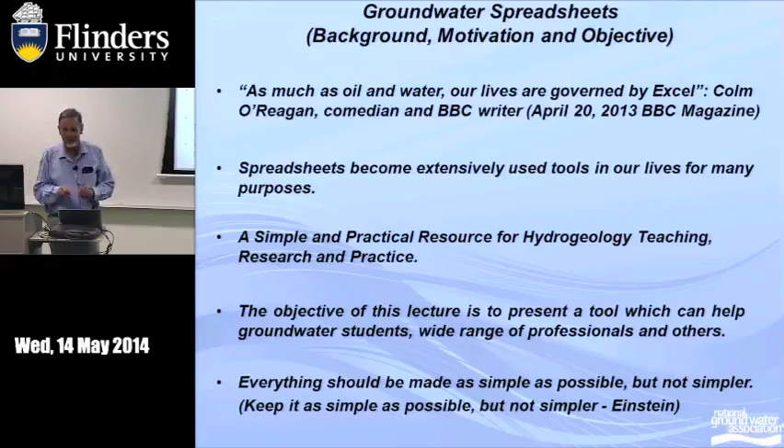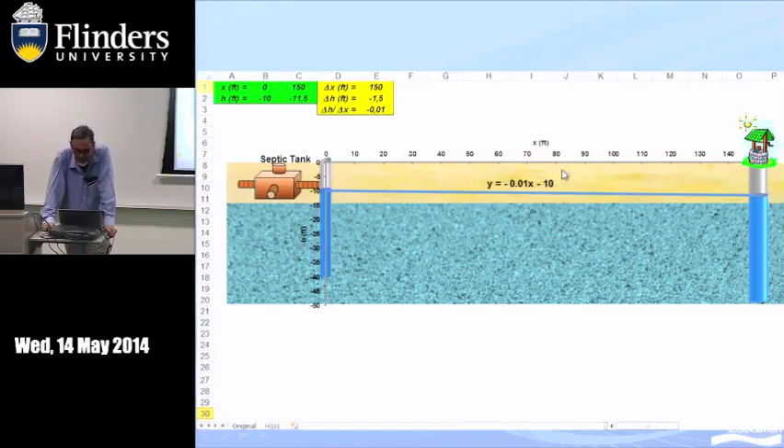I use metric and English units, but as far as you are consistent, here you have the slope. If you have just 2 points to measure the water level, it's very simple: there is just a line between these 2 points. If you use the spreadsheets and choose the linear trend, that's the simple equation.

And if you want to know, for this simple problem, the head every 10 feet, you can replace it here in this analytical equation. But another way to solve that, probably not too efficient, is as follows: the head can be the mean value of the neighboring head, just to obtain a numerical solution. Copy and paste, and of course select the proper values for the graphic, the X and Y, or the X and the head.

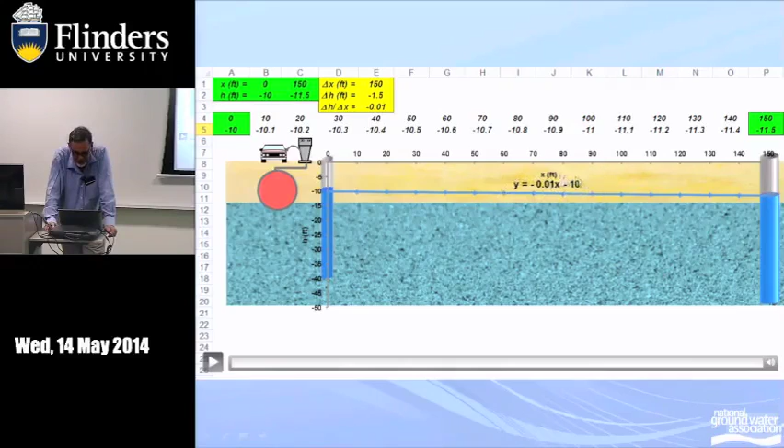And if you choose an iterative solution procedure, that's what you obtain: again the same line, with the head values. So that's a numerical solution of this line, and actually it's the solution for a homogeneous confined flow. We haven't talked about Darcy yet, but for this simple example you have here the analytical solution, this linear equation, and that numerical solution.

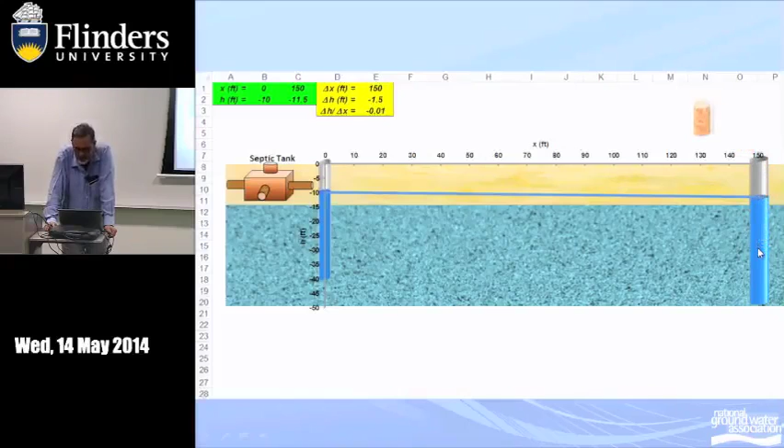Now, some overview of Darcy's law, very familiar to all of us. One way is to take a sample from a borehole and send it to the lab. There are many ways to explain Darcy's law. You take that sample, put it in a device, a permeameter, pass a flow through that cross-sectional area, and measure the difference in head over that length, and that's Darcy's law.

Very often it's convenient to express that equation per unit area, and this is the specific discharge. And if you have the effective porosity of this sample, you get the transport velocity.

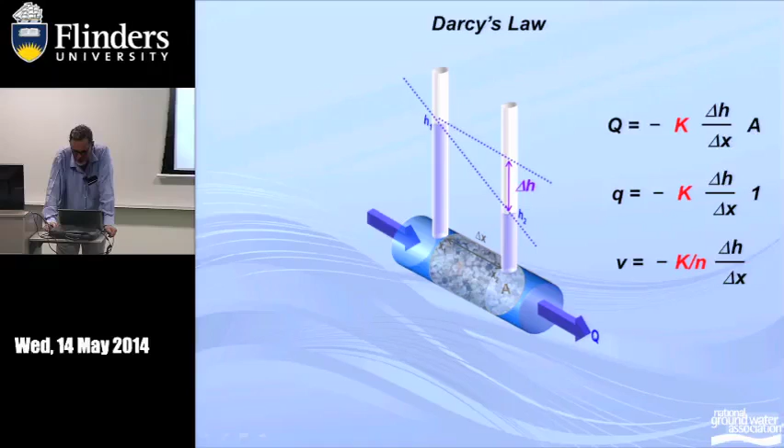So in our spreadsheet, you can recreate this experiment. Here I use green colors for input and yellow colors for output. You just give values of the head, and you obtain the discharge through this permeameter. There are other ways to do that - one is to pick that line with the mouse, pick any of those 2 points, and drag with the mouse to obtain the discharge rate. It's not too complex, and it's a wonderful tool to understand Darcy's law.

Here you can see that it works for Excel 2003. When Excel 2007 came out, well, almost all my problems and courses were in Excel 2003, and that property doesn't work in Excel 2007. So imagine my frustration when all my problems were in Excel 2003.

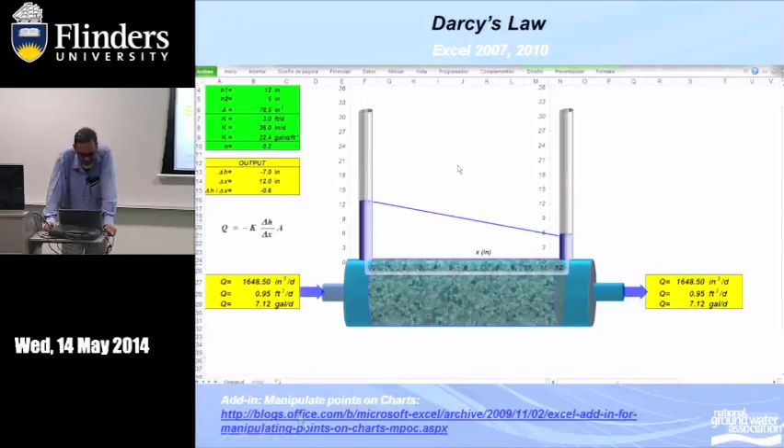But there is always a solution, and it's really a good solution. It was for Excel 2007, 2010, and you can download this to manipulate points on charts. For the same problem, you choose the graph, here manipulate points on the screen, on the chart, and you get that window. Choose that specific graph, and any of these 2 points, point 1 for example, and move that point. It's also a very nice feature to understand, in this case, Darcy's law.

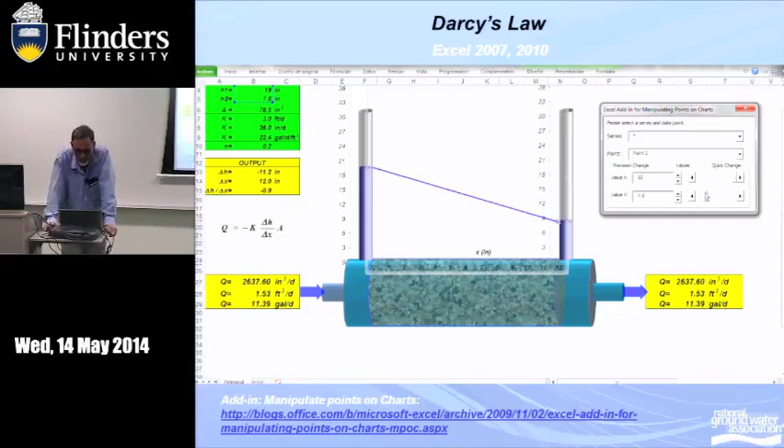It works pretty well. Continue with our first problem - you can calculate the transport velocity for a given hydraulic conductivity and effective porosity. You can measure, very simply, the travel time from this point to this point, and it's 1,000 days, near 3 years. The travel time can be a measure of risk.

If you deal with some coliforms, probably with 3 years the risk is low. If you deal with some hydrocarbon compounds, it can be medium risk, but some persistent contaminant, like some pesticide, is probably a high risk.

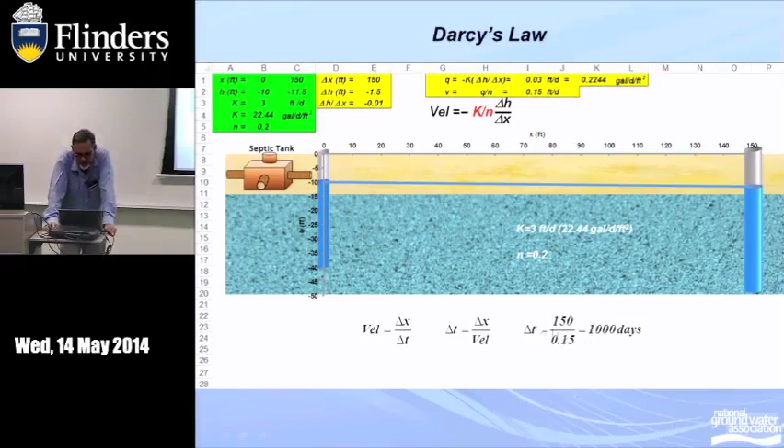But let's do the same, but for a fixed delta time, just to recreate particle tracking. So you fix the delta time - this is the same problem. You update the travel distance for this delta time. That's a very simple equation, and that's this yellow point.

So here I update the x, here is the delta time. By pressing F9 in Excel and choosing the iterative solution, you can see there the movement of that particle. For this simple equation, it travels at constant velocity, and you obtain the same answer, 1,000 days.

So in this spreadsheet, you can represent the analytical solution of the head for one-dimensional flow and the numerical solution also, but the advective transport velocity here is a semi-analytical procedure. Now let's see in a heterogeneous media that can be this special device permeameter.

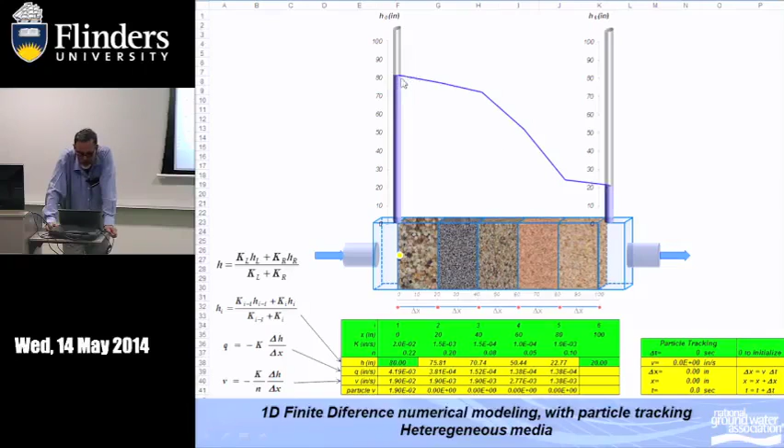So let's make the solution - here there is a horizontal head, so there is no flow. Let's begin with the difference in head between these 2 points, and that's the first iteration, the second, the third, and after 4 iterations for this simple problem, you get the solution for the head.

Now let's track that particle here every 120 seconds for these experiments. There is visually a low velocity of that particle - again, low velocity, which of course depends on the gradient and the porosity. But let's see here, you can see that it increased the velocity of that particle, and then again low velocity, compared with the previous one.

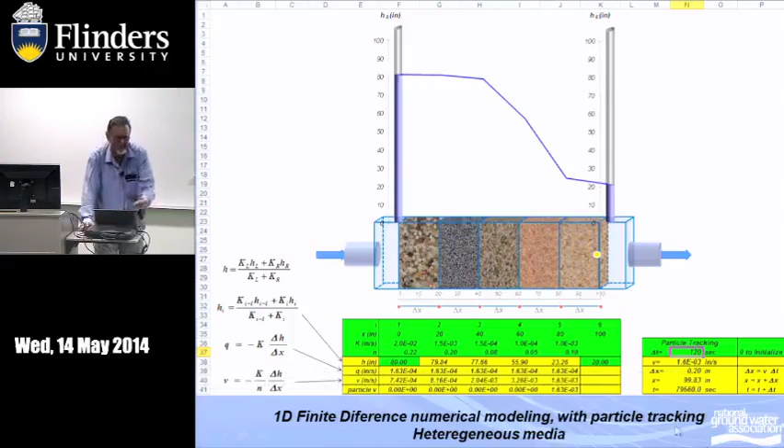Again, here is just a single formula, just an arithmetic, algebraic formula, copy and paste, and that's the way it works for all the models. Even MODFLOW - that's the principle of particle tracking, and also the finite-difference solution. So that's why it's an excellent resource, especially for teaching groundwater flow.

Now, the hydrological cycle can be used for groundwater management, for climate change analysis, sustainability issues. And well, this is the hydrological cycle.

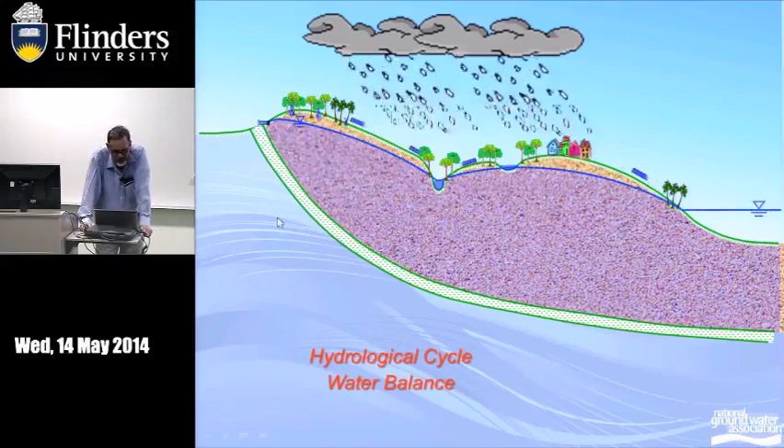Well, you can find in many textbooks the rain, the surface runoff, surface retention, infiltration, groundwater replenishment, interaction with the environment, here some spring, here also connection with the surface stream, with wetlands, regional flow, evaporation from the sea or lake, evaporation from surface water bodies.

If you have a shallow water table, it can also be evaporated, transpiration by plants, and groundwater use. So that is an ecosystem, that cartoon, and there are also other species that depend, especially groundwater-dependent ecosystems, like birds, which depend on riparian vegetation, which in turn depends on groundwater, and some fish.

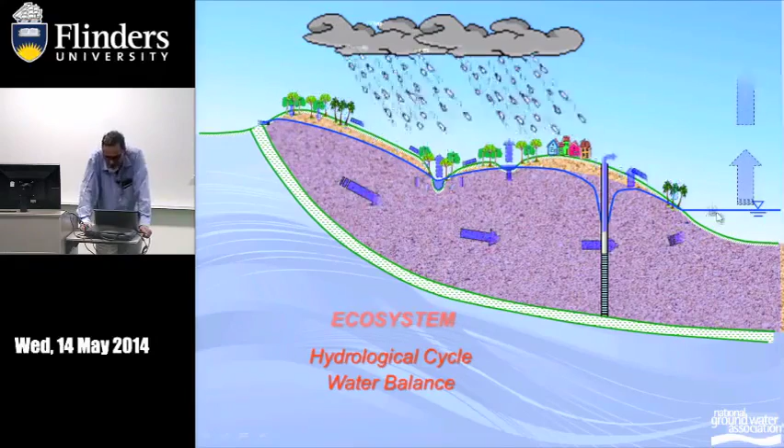This transition zone between groundwater and surface water, the hyporheic zone, plays an important role in some species.

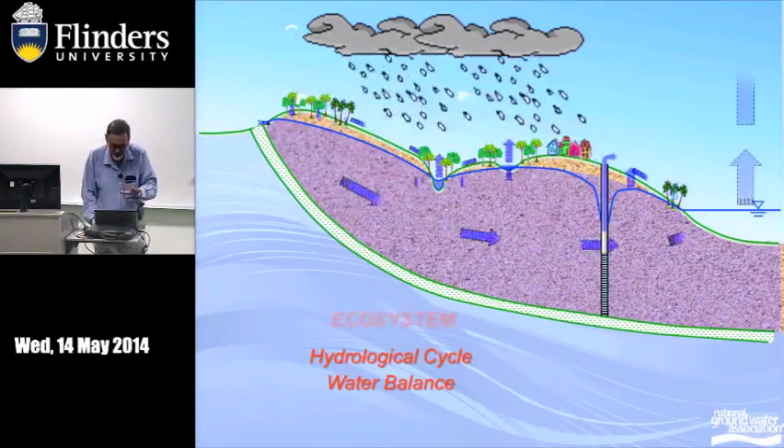This figure, this cartoon, this conceptual model, you can also model in Excel. Here is the same figure with some values: homogeneous hydraulic conductivity, the x direction, infiltration of 200 millimeters per year constant, the water level in the river and wetlands, the resistance between the river and surface water bodies and the groundwater, the pumping rate of this one-dimensional well—actually a channel—and the bottom of the aquifer, the saturated thickness, the transmissivity. For this specific problem I include a seawater interface using the Ghyben-Herzberg approximation, and this is the interface.

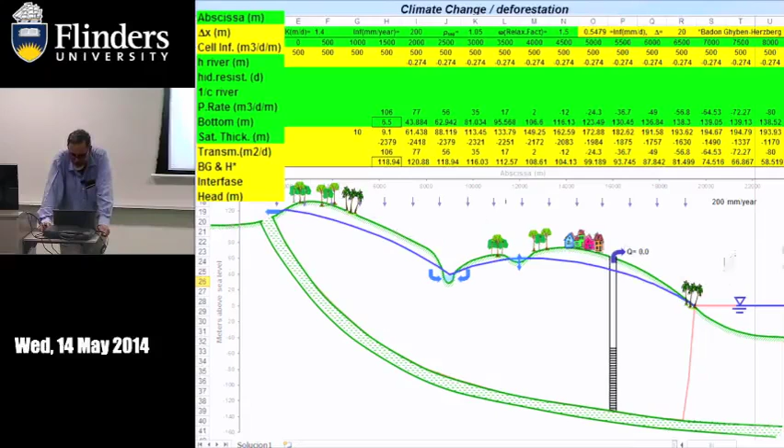So there are many ways to play. Models can be used to analyze different behaviors. Suppose you lower the infiltration 10%—can be climate change, can be deforestation. For this particular case, there is an impact on the springs, probably they disappear, a decrease in base flow, an impact on wetlands which sometimes disappear, an impact on vegetation, and in general, if there is a groundwater-dependent ecosystem, there is an impact on the whole system.

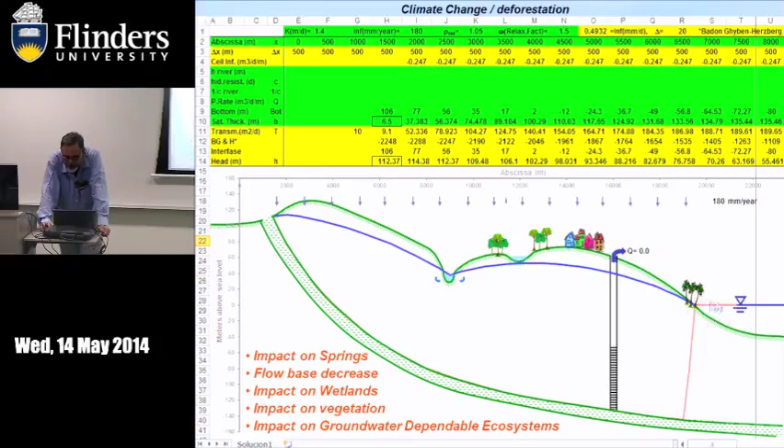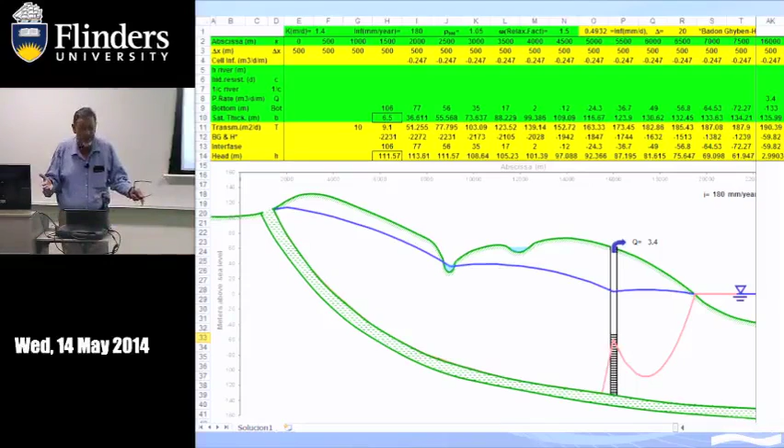You can also raise the sea level—this constant head—I raise it 4 meters just to see visually the seawater intrusion, so you can see the difference. Also, if you pump that one-dimensional well, there is an iterative solution, so you can see that kind of upconing of seawater intrusion in that well. That's another simple way to analyze that kind of system.

Pumping and slug test. A pumping test is just the drawdown as a function of the distance from the observation point to the pumping well, and as a function of time.

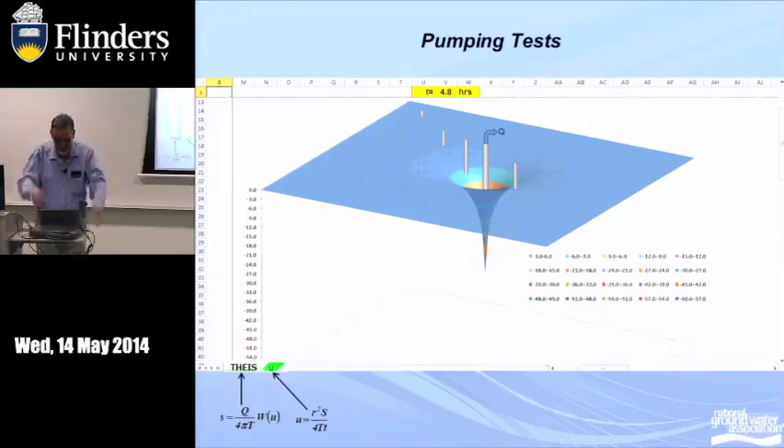This is the solution for a confined aquifer, so I use the Theis equation. If you are familiar with the Theis equation for a confined aquifer, use a single formula, copy and paste. I use two spreadsheets, one for the drawdown, and the other for the parameter u, which depends on time. I don't want to explain any formula, it's just the way to apply spreadsheets, again without any programming. You need the appropriate formula, copy and paste, and use the graphics display of Excel.

This is the classical solution of a pumping test in a confined aquifer. Here we have the field data: the well discharge, the distance of the observation well to the pumping well, and the time-drawdown data. In this graph, drawdown versus time—these black points are the data, and this gray line is the type curve for a confined aquifer, which I get from existing textbook references. This is the typical well function for a confined aquifer.

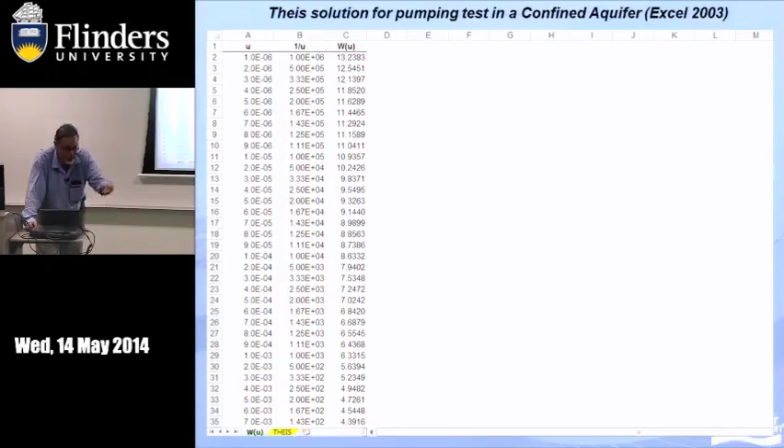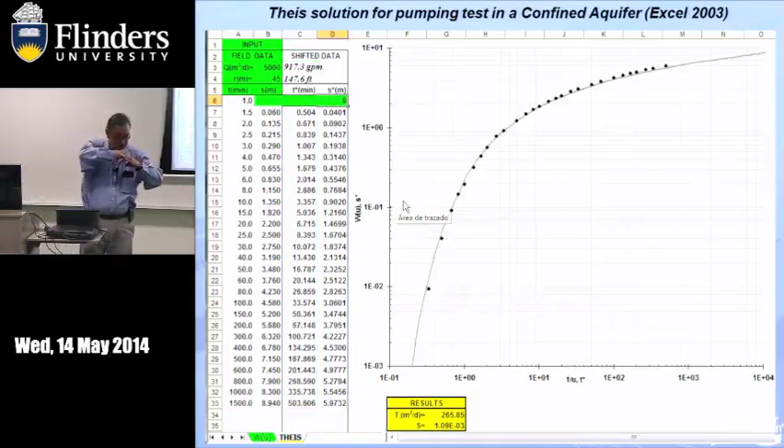You can use this for a semi-confined water table, or partial penetration. It's the same approach as we did more than 30 years ago, but now with the spreadsheet. You just pick with the mouse the point which is related to the others, and in the lower part you get the transmissivity and storage coefficient. You can zoom in to fit the field data to the type curve. So that's it.

Another way is an automatic fit—this is exactly the same problem. Here you fix the data and you get the approximation of this theoretical curve to your field data. You have to give some initial guess. Here is the reference, Carl McElwee from Kansas Geological Survey.

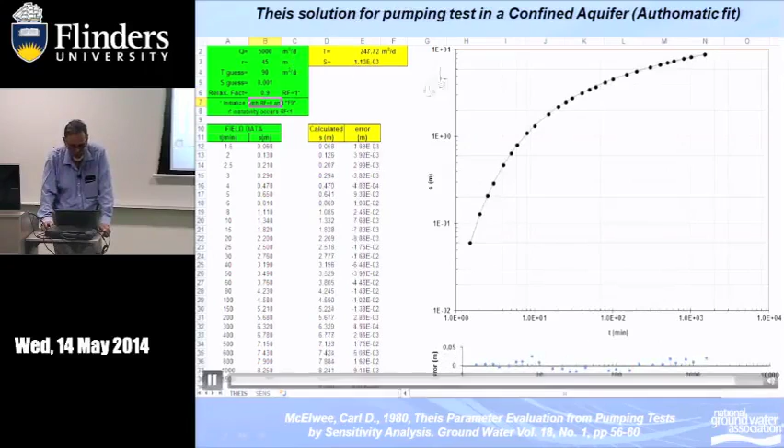In the lower graph, there is the difference between the theoretical calculated and the observed data. There are also other add-in packages like solvers if you want to do statistical analysis. But here you can see that iteratively, in approaching the theoretical curve to your field time-drawdown data, it very often jumps up and down and you never get the solution, but you can see it visually. In this case you use a relaxation factor, and you continue with the approximation until you get the final result of transmissivity and storage coefficient. Here is the difference between the theoretical data and the observed data.

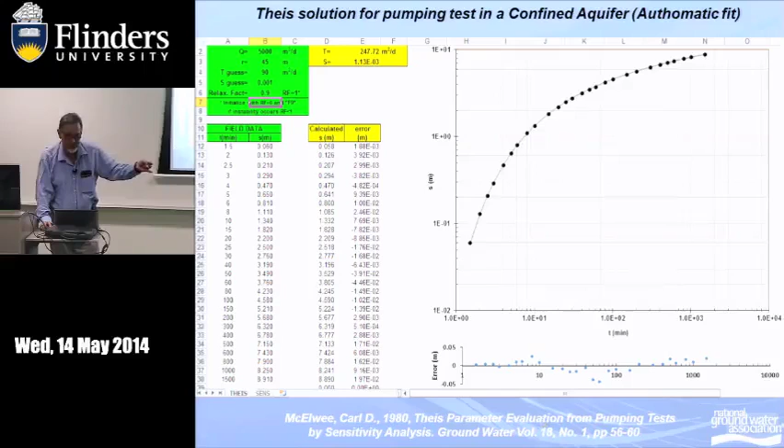Very recently, Neuman improved that approach to take into account the unsaturated flow. But there are a lot of books on pumping tests. You just put the appropriate table and fit in the same way to calculate your pumping test.

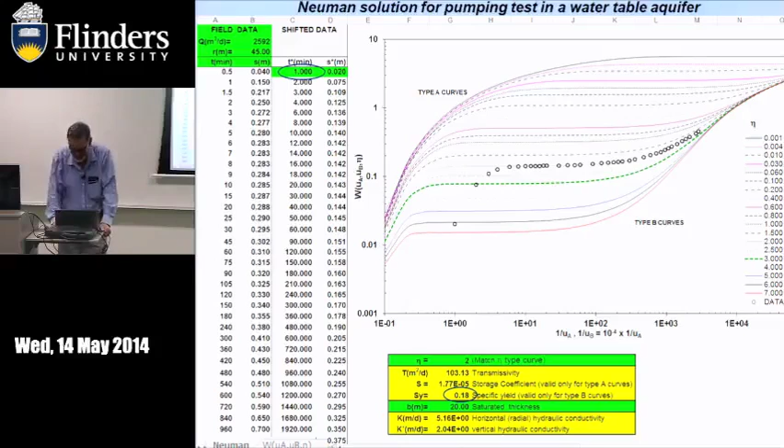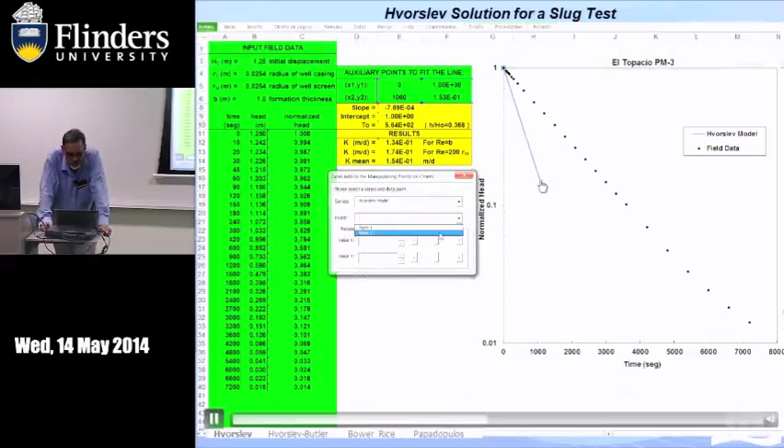A slug test. There are some procedures. This is the Hvorslev solution. Again, the time ahead, the initial displacement, and you get the hydraulic conductivity using that line. For example, if you manipulate points on the screen with that window, you choose any of these 2 points, this point 2, and just drag it. In less than a minute you can fit your data and get the hydraulic conductivity.

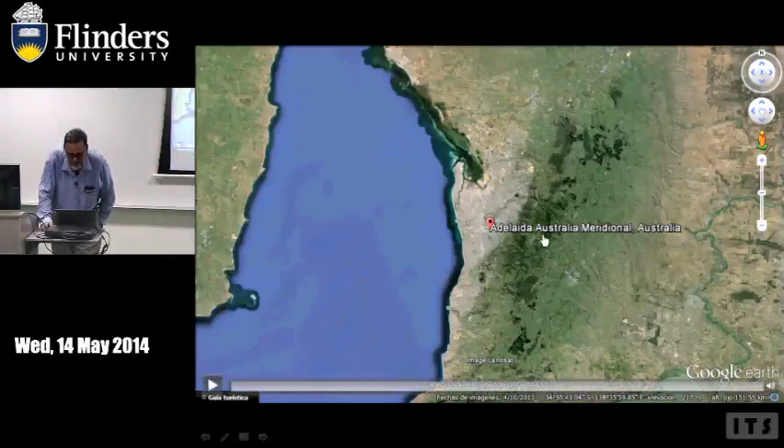Okay, now we are in Adelaide, in Spanish, Australia Meridional. But let's go to Colombia. Here with Google Earth it's very nice. Still, I have my jet lag. It takes me 3 days to go from Colombia to Australia. And this is Bogota, Colombia.

We have here some plain, the Bogota plain, Sabana de Bogota. Now there is some map, let's continue. So this is the Bogota plain, the Bogota river, and the flat area is mainly silts and clays, so not permeable. There are some local sands, but the main aquifer is a sandstone.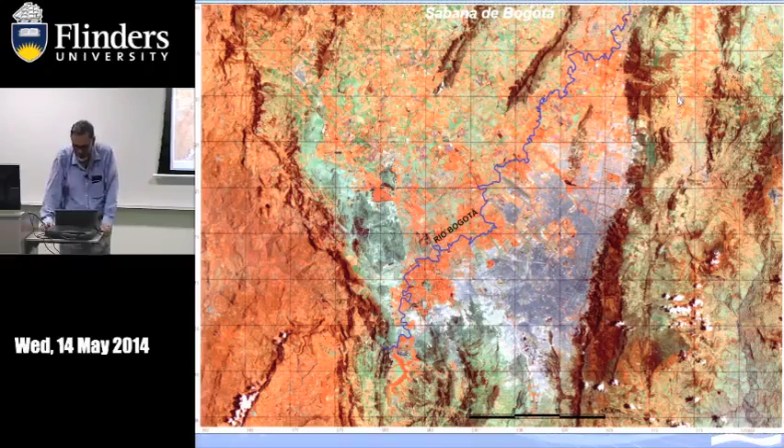Here are the outcrops, so there is limited recharge. I don't want to show you all the structure and the complex geology, but there are some faults. Let's see some pictures. So this is Bogota, the flat area, clays and silts, and the sandstone.

You see here the dip is almost vertical, so there is a very big fault here, and here some fractures. That fracture, but also this is the place where I worked, University of Los Andes, the Faculty of Engineering. But let's see another view, and you can see here also the depth of that sandstone.

And this was a pumping test we ran 30 years ago. Let's zoom in. What I want to show you is that we used one well and 3 observation wells. That's the theoretical cone of influence for 1 day, 2, 5 days, 10, 1 month. And this is for one well. Now we have thousands of wells, so the sustainability issue is a big problem.

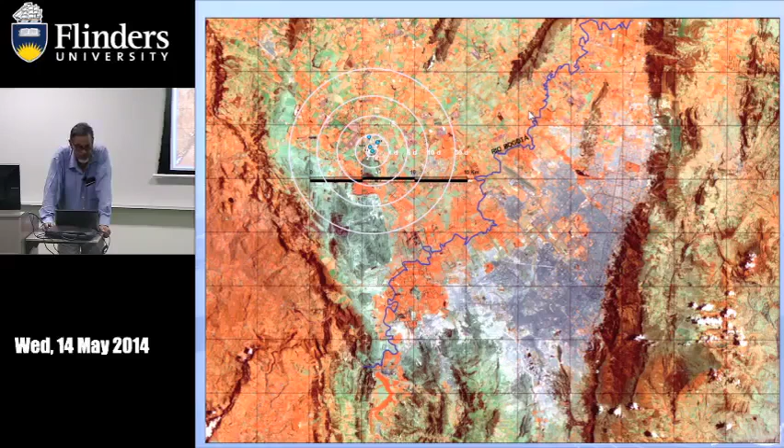There is a depletion of the aquifer, but we use spreadsheets for that calculation. This is a very simple problem, just the drawdown in the aquifer. You can include well losses, of course, with the transmissivity and storativity of that aquifer. And this is the solution for 1 day.

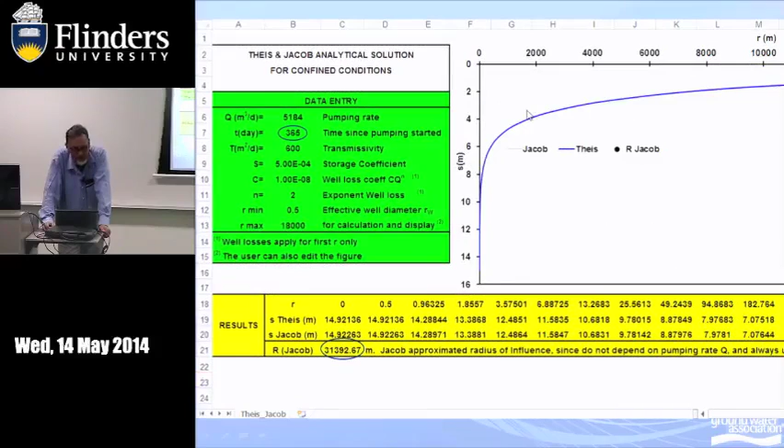This is the theoretical cone of influence for 1 day, 5 days, 1 month, and so on. So that's another way to use spreadsheets.

Superposition principle. Well, superposition principle is just the additive property of linear systems in space and time. And spreadsheets are wonderful to work with that superposition principle. This is the solution, the steady solution in a confined aquifer. There are formulas, but I will not explain that.

That type of formula you just put in a single cell, copy and paste through all the spreadsheets or the area that you want to analyze. Here the parameters, of course the hydraulic properties, but also the well discharge and the location of that well. Here is well number 1. You can copy the entire worksheet to another one and change the well discharge of that specific well and the location of that well.

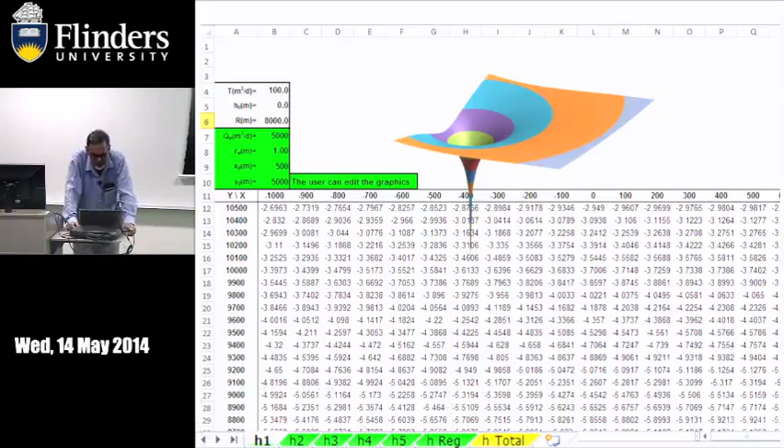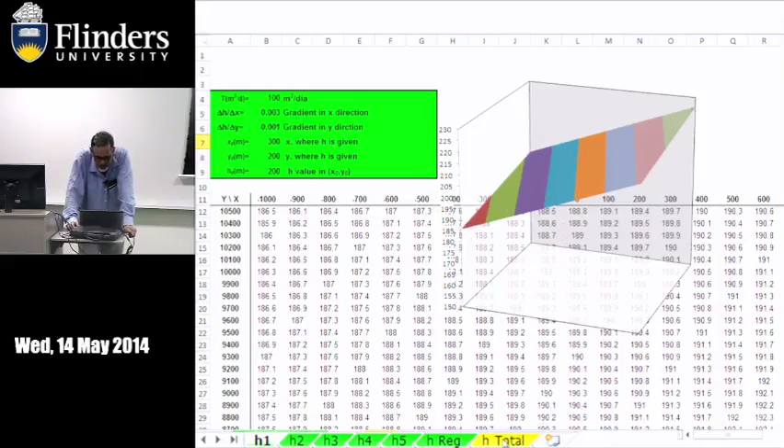And you can include 2, 3, 4 wells for these specific problems. I have 5 wells. You can include a regional gradient, here the slope in X and Y direction. And the result is just the sum of all the previous spreadsheets, and that's it.

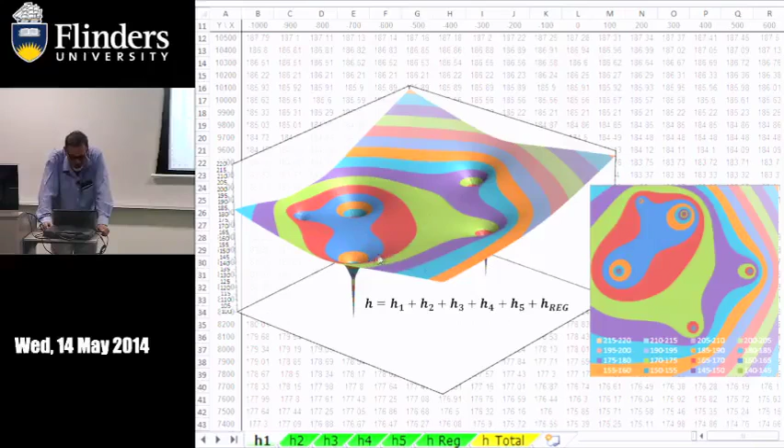So that's an analytical solution of multiple wells. We used it in Bogota mainly for the flower industry, which has some wells. If they find a good well, they just drill very near another one because that well produces water. That's the way they think, and it's difficult—it's completely different from how we think. That's also one way to show and calculate the influence of a neighbor well on the whole system.

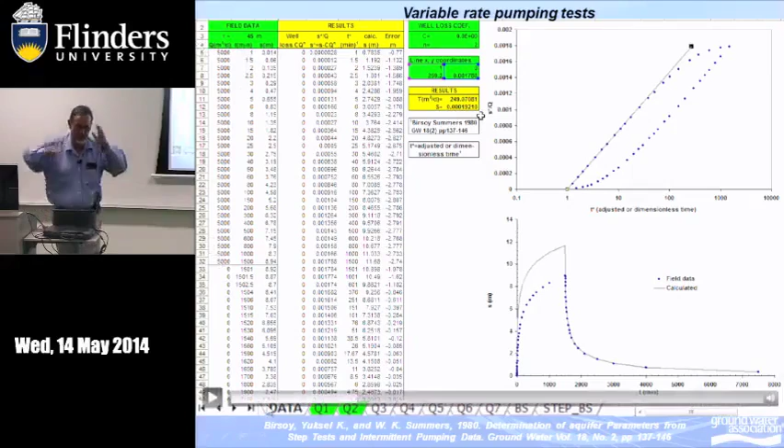I haven't seen this procedure in the literature, but you can use the entire data as shown here. The approach is to adjust until you get a good match between the theoretical simulated points and your field data, and from that you get the transmissivity and the storage coefficient.

I have probably hundreds of pumping tests. This is a pressure transducer in some well, showing the pumping stage and the recovery stage. We advised the well owner not to pump the well, but nobody was there, so he decided to pump for 5 minutes, and the pump was damaged. But with this procedure, you can include this case too, getting the transmissivity, the storage coefficient, and the well losses.

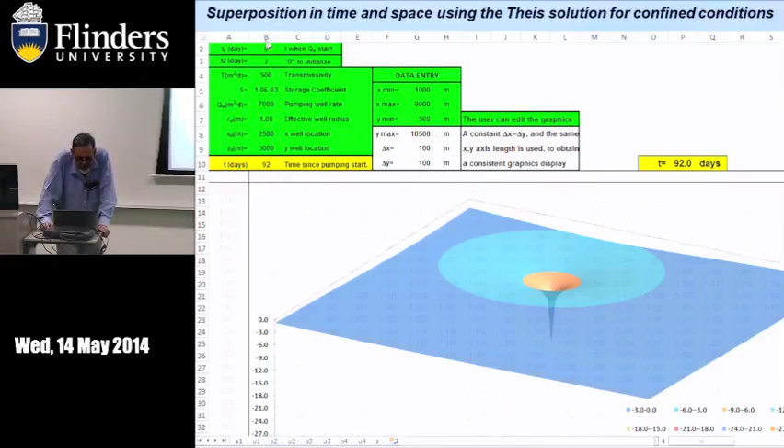This is the Theis model also, but with a variable rate. The last pumping test example is very similar to the first, using the Theis equation, but this particular well begins at time 0, while a second well, with another pumping rate and location, begins after 1 month, and so on.

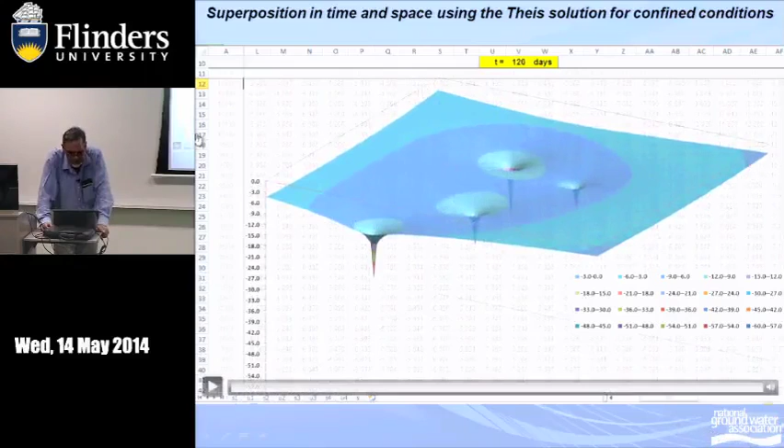Here I have 4 wells, and here is the cone of influence. The second well begins after 30 days, another after 60 days, another after 90 days, and if you have more wells, you just copy and paste. This type of 3D graph uses the built-in Excel graphics.

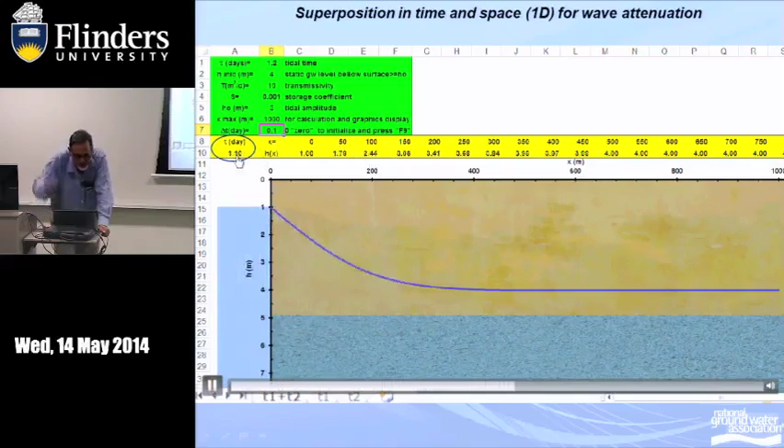I have one, but probably more examples. This is also superposition in time and space for one-dimensional wave attenuation. When the head increases, the tidal rise, I use one spreadsheet, and another one when it's lowering. Here we have the time of that tidal cycle - it dissipates the head in the aquifer, and after 1.2 days it lowers again, and you can see the wave attenuation.

So, well, you can also solve that type of problem.

Here I combine particle tracking with superposition. I adapted this for a real problem, with the gradient in that direction. There were 3 wells, and some release occurred in this area. You can give any color to the particles - in Excel I use red for polluted or contaminated particles, and white for fresh water.

Here is the gradient and the delta time, so you can see how each particle is moving. You can include any wells you want. Here I lower the delta time just to avoid jumping along the well.

You can see here that it will capture white or clean particles at this well too, but precisely these red, contaminated particles go to the farthest well. That's one way to use particle tracking and superposition. Again, it's just copy and paste - I use the velocity field for all the wells.

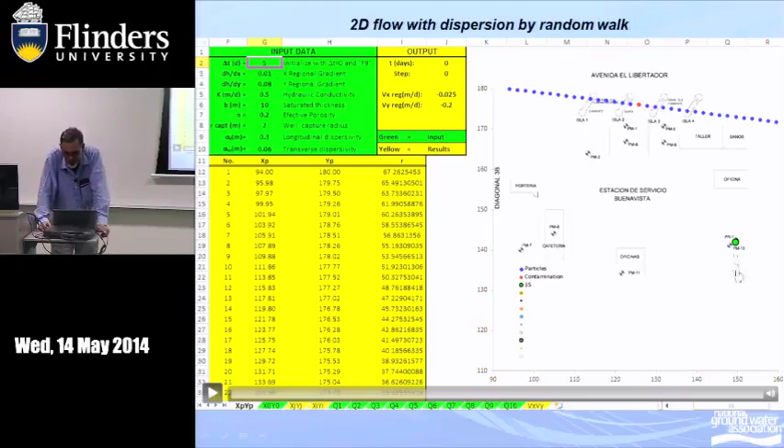Here is the same approach but including dispersion by random walk. This is a service station in Bogota. The gradient is in this direction, and blue represents clean particles, clean water. Here you have one red particle, but actually there are 100 particles in the same position. They do not allow drilling a remediation or pumping well here, only in the corner, so you can see the remediation is not too efficient because you pump clean water.

What happened here? Well, also almost all the contaminated water was pumped, but not all of it - some contaminated water just goes to the neighboring property.

This is using earth resistivity soundings - two-dimensional earth resistivity, but also one-dimensional earth resistivity geophysics survey, mainly for groundwater exploration.

What you have here is the field data - you measure on the surface terrain the apparent resistivity as a function of electrode separation, and plot resistivity versus electrode separation, that point there. You have an earth resistivity layered terrain; this is the theoretical curve, and this is the response.

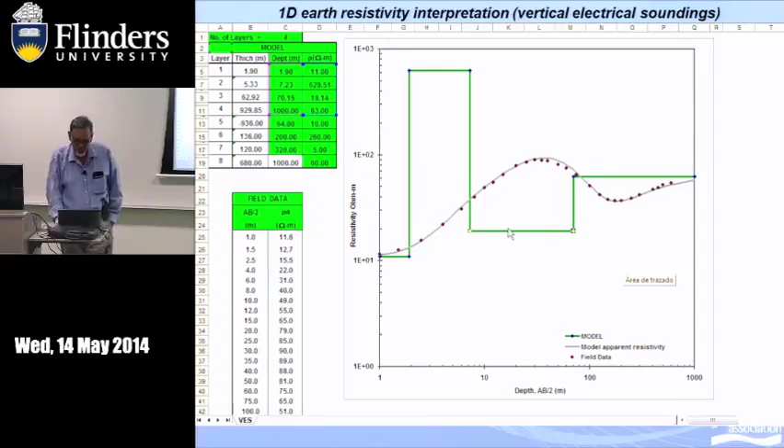So that's another way to use the superposition principle, and there are a lot more applications of this procedure: numerical models. We have talked about numerical models, and you have many very robust ones like MODFLOW and FEFLOW, but here is just a way to copy and paste with the proper formula, as we showed in the first slide. Let me show how a two-dimensional model is constructed.

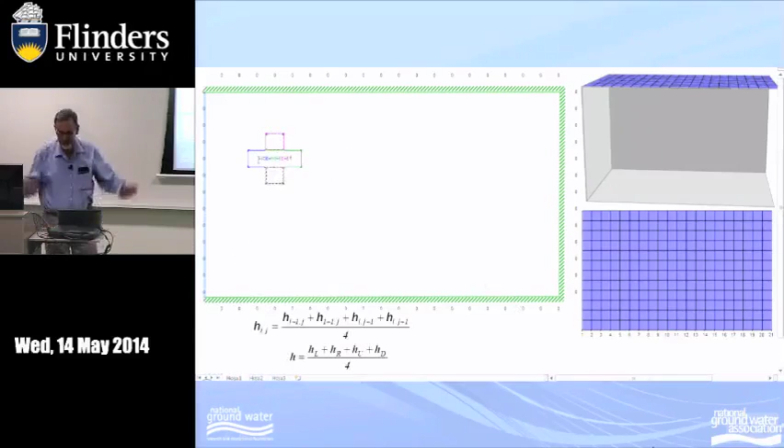Here it is built: a no-flow boundary here, and a constant head boundary, in a homogeneous two-dimensional aquifer. So the head in each cell is just the mean value of the neighbors—left plus right, up and down—and you use copy and paste through the entire domain.

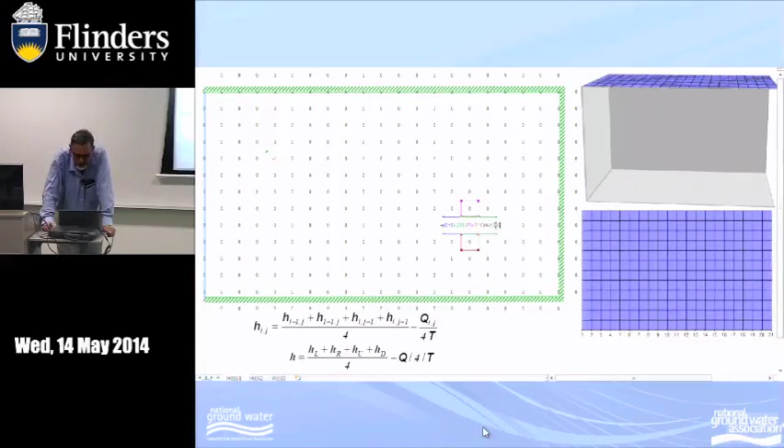You can, here I will put 2 wells. This is the formula, I don't want to explain in detail, but it's a very simple algebraic formula: the well discharge divided by 4, divided by the transmissivity. And here another well, same formula: the well discharge rate divided by 4, divided by the transmissivity. And you begin to iterate.

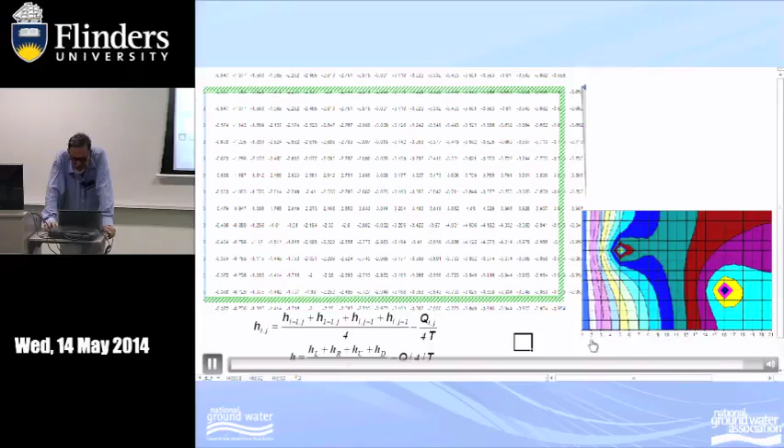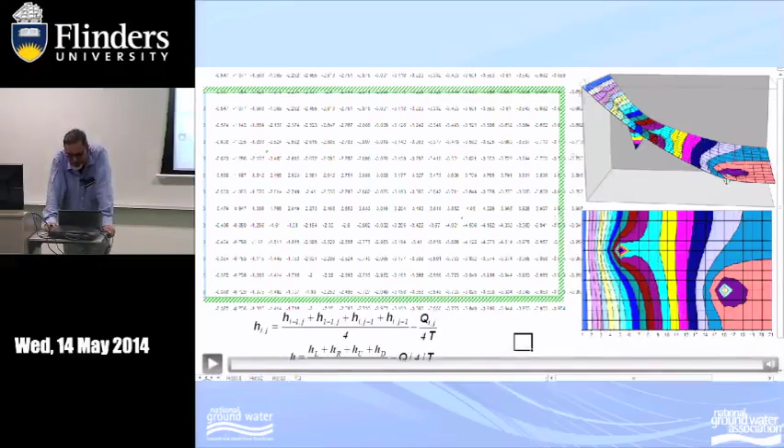Well, after some iteration, you can just press F9, and then you end up with the result. So we constructed in a minute a two-dimensional, very simple model. But here you can see the surface head, the potentiometric head.

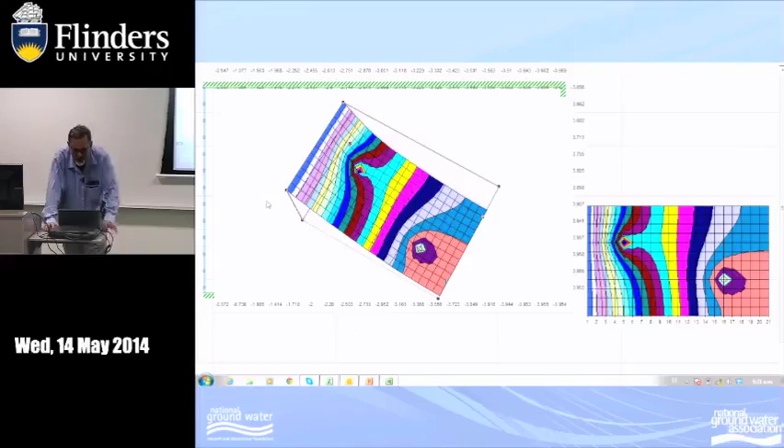Another feature of Excel 2003 is that you can pick—you can do that also in Excel 2007, but you have to work at it. I don't know why they didn't maintain that property—but you can pick one of the corners and drag and see it from below. It's very simple. I still use Excel 2003 here, of course Excel 2010 and so on exist too.

Some example of water management from pre-Inca times. This is a project with the Department of Anthropology at the Universidad de los Andes. They are interested in many features about, and also about, water management of pre-Incas. These are some terraces of pre-Incas.

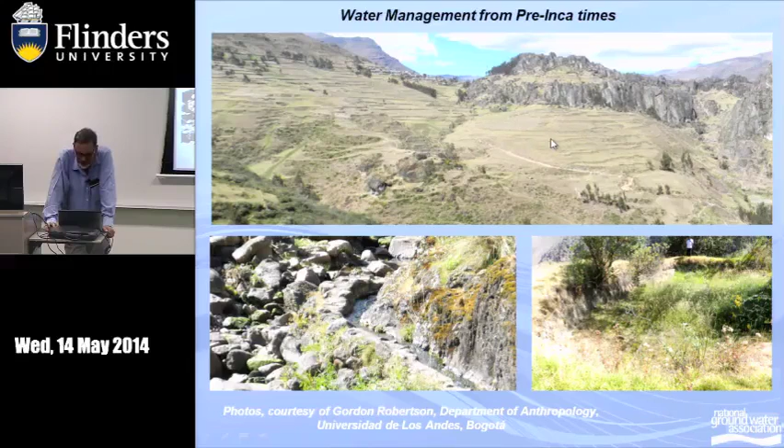And of course, surface water is still there, they have channels. But groundwater, there are all terraces. And Incas learned from pre-Incas. This is Machu Picchu, so they used these terraces for drainage, for erosion control. This is a short video from National Geographic; you can see the entire video on YouTube.

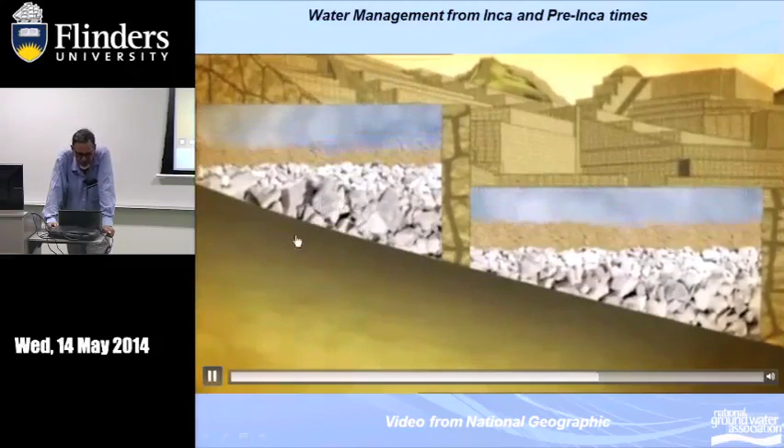Some of the excavation shows really a drain in those terraces to evacuate the rain, the infiltration, to maintain the humidity in the soil for crops, and depending on the fractures of the bedrock, sometimes evacuate the flow through the bedrock, but also they have some drains.

We are at the early stage of this project, but spreadsheets can be used to analyze it. So anthropologists now learn how to use spreadsheets. You cannot construct monitoring wells or boreholes in those terraces, but here just to figure out how much water each terrace can evacuate through drainage. The rainfall in Machu Picchu is about 2,000 millimeters per year.

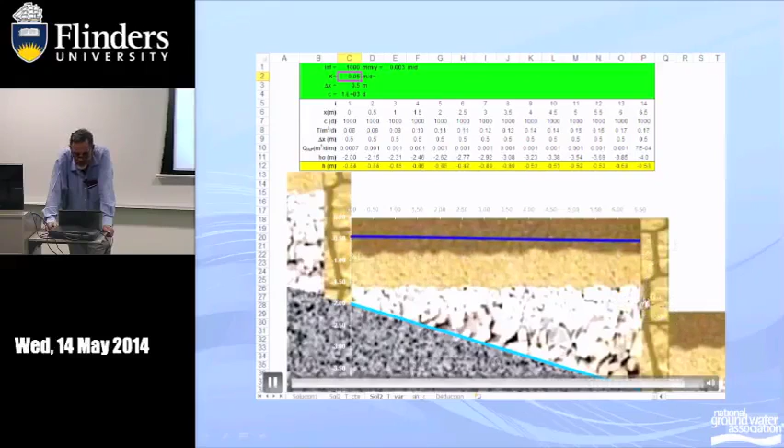So here with some hydraulic conductivity, the resistance with the bedrock—well, we have many scenarios, but for this particular one we increased the infiltration, so you can see here the movement of the water table in that terrace. Sometimes they put the drain here, and of course it can evacuate more water to the next terrace, and so on.

Let me show one example of the use of spreadsheets, in Santa Marta, a Caribbean city in Colombia. Well, this is an alluvial aquifer surrounded by impervious granitic rocks, and this is the Manzanares River, and some of the water of the Manzanares River is lost to the sea.

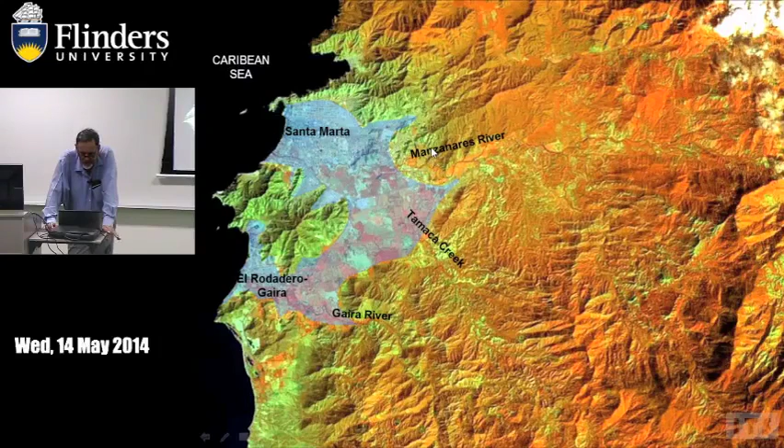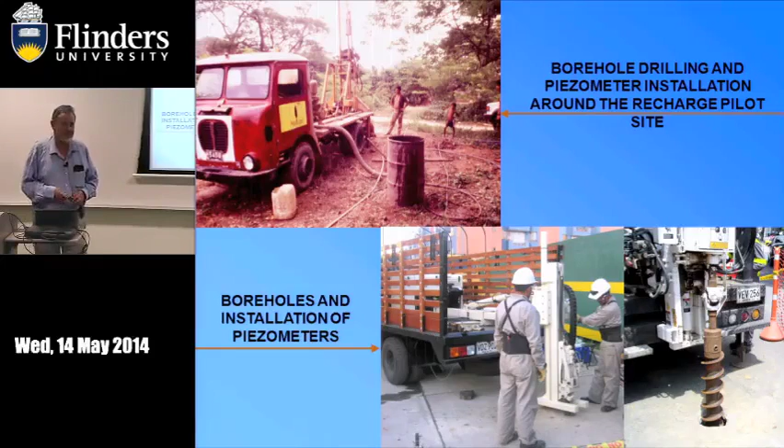And we drilled like 90 boreholes, and then we sold it for the same $4,000. Well, of course, the municipality later drilled many more boreholes with some new equipment. And we install piezometers in the stream bed.

Well, there are some safety issues here, but this is one of my best students, Flavio Bonilla, who now deals with nanotechnology and transport of viruses.

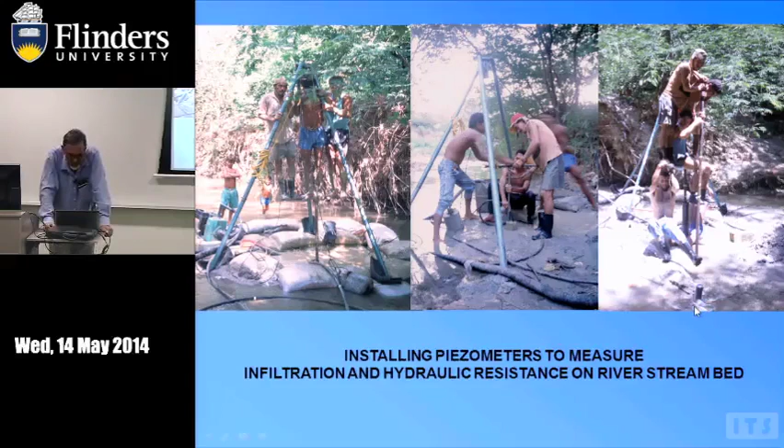Sometimes you have to include the resistance or conductance of the riverbed, and very often you just pick from the surroundings. Here it's with this hand auger that you can install boreholes to measure infiltration.

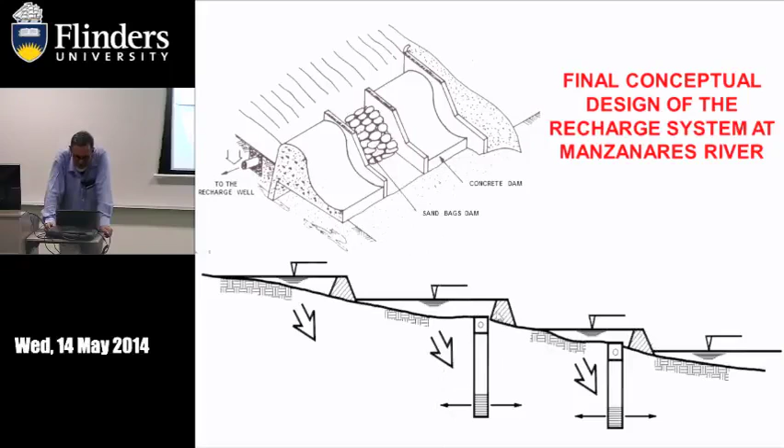This was the final conceptual design: two concrete dams with sandbags in between, just to evacuate the peak flow. It is very manual. We constructed the first structure, and the municipality the other. We also tried infiltration wells, but they were not too efficient because the head is not too high.

We took that idea from the Santa Ana River in California. They use inflatable dams; we use sandbags.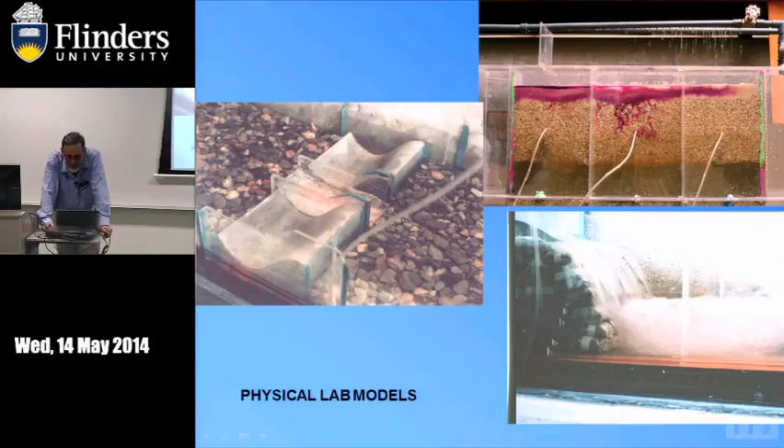But it works. A lot of labs, experiments, and infiltration, some fractal behavior. Professor Carlos Puente from Davis also analyzed that behavior, along with some in situ infiltration tests.

That's the recharge system: the conceptual design, the lab models, the recharge structure, and here also how it operates. And of course, the spreadsheets.

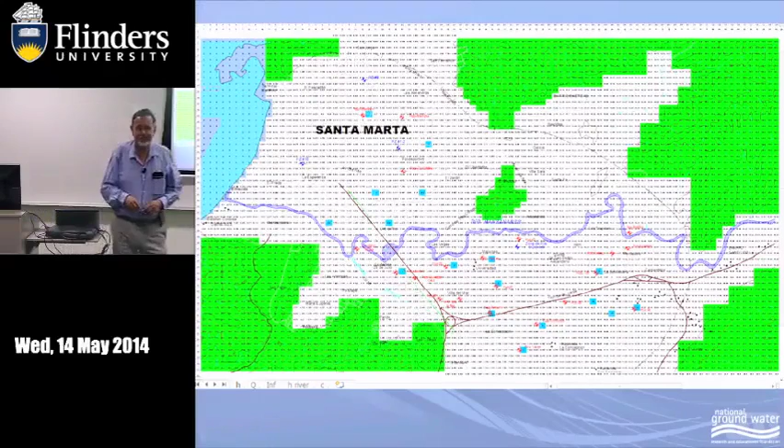It was like 20 years ago. At that time we didn't use Excel, it was Quattro and, oh, I forgot the other one. But now with the students, well...

This is a two-dimensional model. And of course the river, here, there are some blue points that are the wells. This is the Excel model also of the river, and the structure is located more or less in this area. This is one of the scenarios we model.

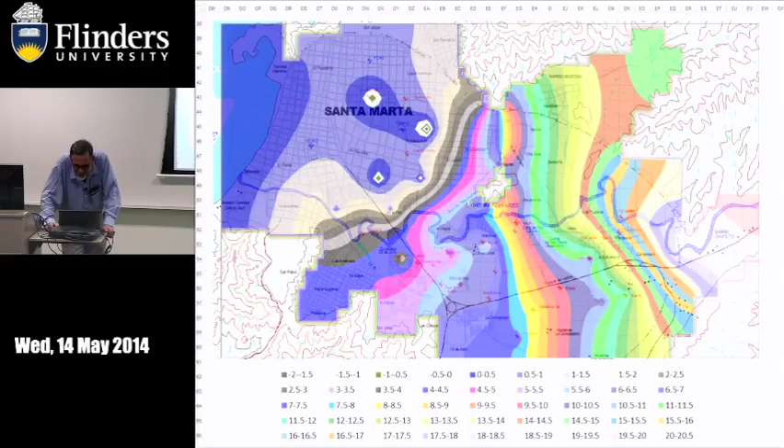You can superimpose the Excel graph over a map, and you can draw here the flow lines from the river. That's one application of a spreadsheet. And this is time dependent.

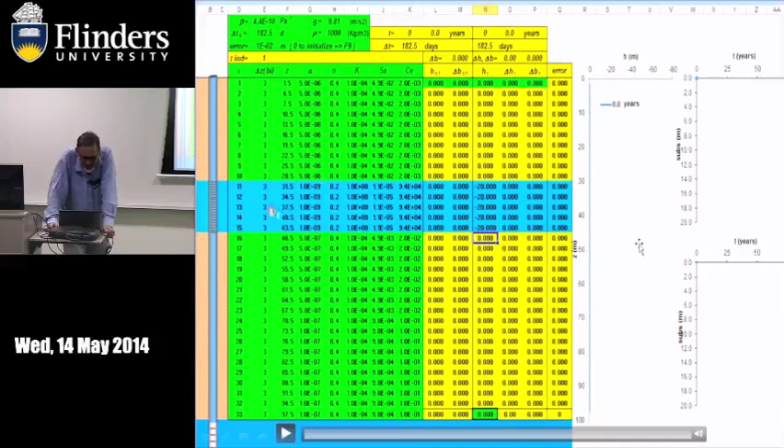You can use spreadsheets. I use a vertical finite-difference spreadsheet every 3 meters. Mexicans use first a shallow aquifer, shown here in blue color. I have the head at time t, the head at time t minus 1, and what's the change, the compression or subsidence per each finite difference.

Here are some of the geotechnical parameters, and here the head as a function of depth. In the first year, they lower the head in this part of the aquifer, but the head, the pressure, dissipates through the clay deposits, as you can see here.

In this graph, it subsides as a function of time. Then, after some years, they began to use the second, deeper layer. Of course it dissipates and the subsidence is still going down. That's one way to model a transient one-dimensional flow and also one-dimensional subsidence.

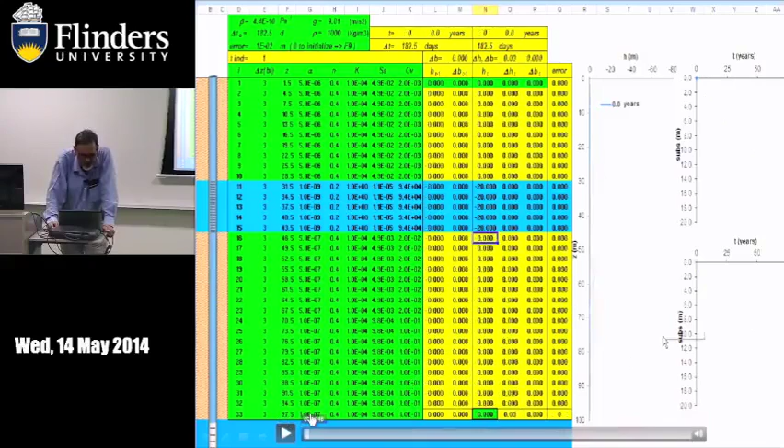You can see the well on the left that is going up. This is just to simulate what is happening there. Flow system analysis, let's continue.

Flow system analysis: József Tóth was the father of flow system analysis. Here we solve numerically the flow through a cross section. What he did was apply no-flow boundaries in this cross section and superimpose an undulated water table in a homogeneous aquifer.

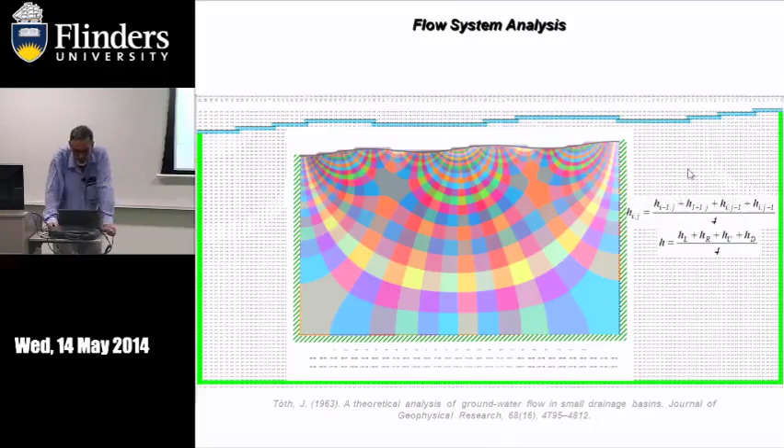With these boundary conditions, and a constant head condition, you can also use the dual problem for the flow, again using the mean value of the neighbors, to analyze the local flow, the intermediate flow, and the regional flow.

This is the same problem, but here I put some particles on the recharge areas and did some reverse backward particle tracking.

So you can see here, I use one spreadsheet for each particle, and you can see different travel times - very slow flow paths, some more fast, and also some particles that reach the stagnant areas, like this yellow area.

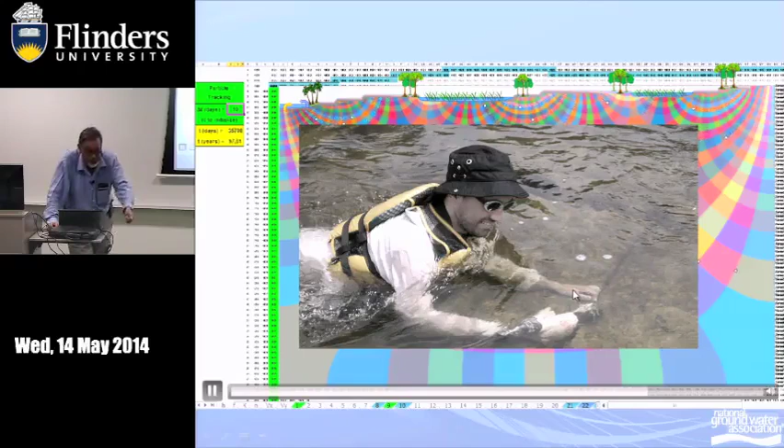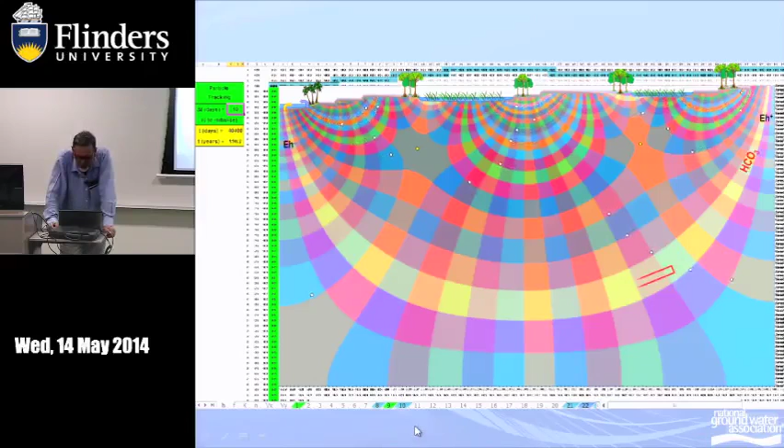So to analyze wetlands, vegetation, phreatophytes, you can see here a fresh cold spring, and here a saline warm spring. In fact, Professor Gleeson from McGill University finds springs by measuring the temperature. And many other features like redox potential, oxidizing, reducing, ion exchange, accumulation of total dissolved solids, temperature, and so on.

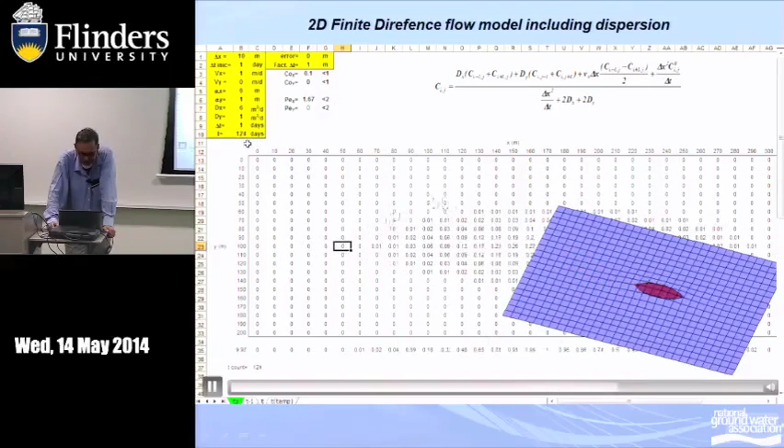This is a numerical example of dispersion. You can couple with two-dimensional flow, but again, here some release, part per million, and you can see here graphically and numerically the dispersion, the natural attenuation of that problem. And many, many other applications.

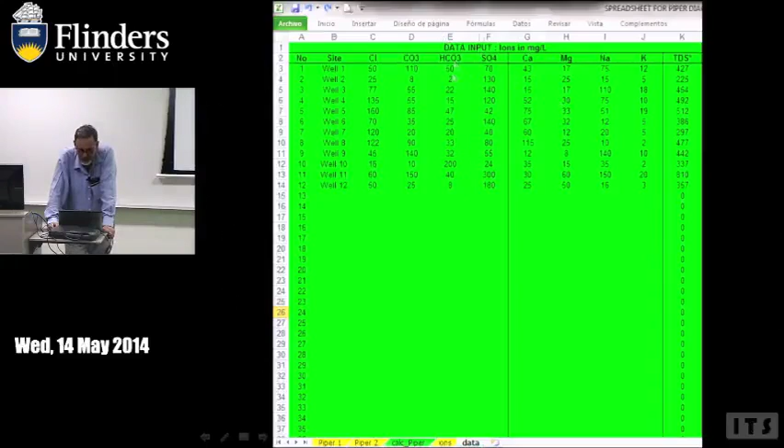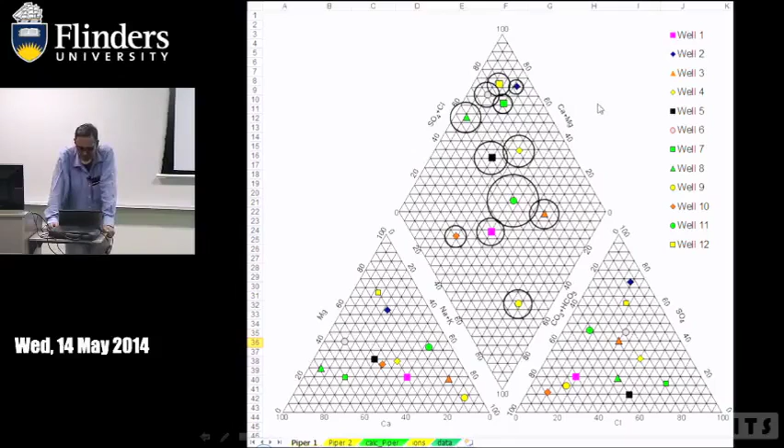The Piper diagram, the ions, the cations, and the anions, and here also the output of the ions. Many ways to put the data there. And many others - here the Domenico solution for groundwater contamination, sieve analysis to calculate the hydraulic conductivity, well logs, and so on.

Unsaturated groundwater flow, when you have a wetting front in the soil. So there are hundreds of applications. I can talk the whole week about problems, but really that's what I want to show you, just to emphasize that it's really a very, very good resource for teaching.